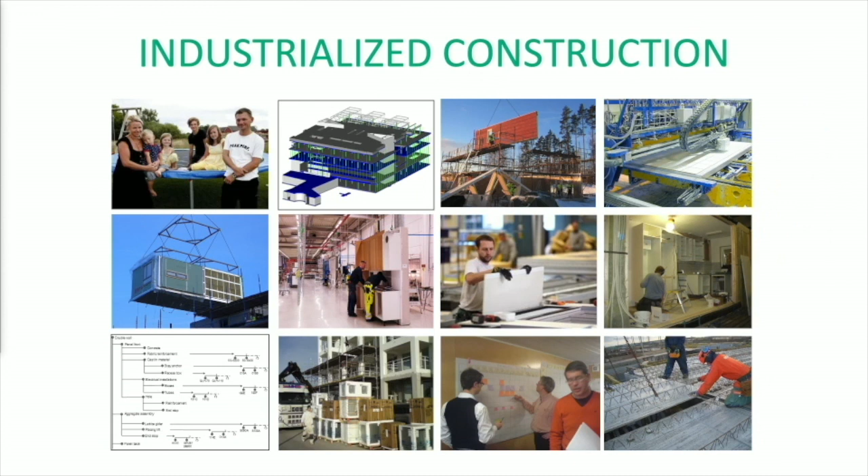Well, the fast answer is that it's all this. So what is all this? Well, these are a number of different aspects that I think are required to make up the concept of industrialized construction. As you can see, there are many different aspects - there are even some more that are hard to get on a picture. But I think obviously prefabrication, automation, and production methods are there - maybe some of the things you come to think of when you think of industrialization.

But you can also see that there is the use of digital tools and systems - it's there already from the beginning. But we also have standardized technology, standardized processes, we have planning, long-term relations, logistics, and not least, customer and market focus. So to really make sure that we are producing buildings, homes, offices, hospitals, or whatever we are building, that are in line with our customers' needs and what the market requires from us, with all the prerequisites put on this.

Then you could argue, okay, yes, but we have heard this before, we have heard it for many years. Standardization is nothing new, and planning has been carried out since the beginning, and so on. All that is, of course, true. But this is the thing: all these aspects need to be integrated.

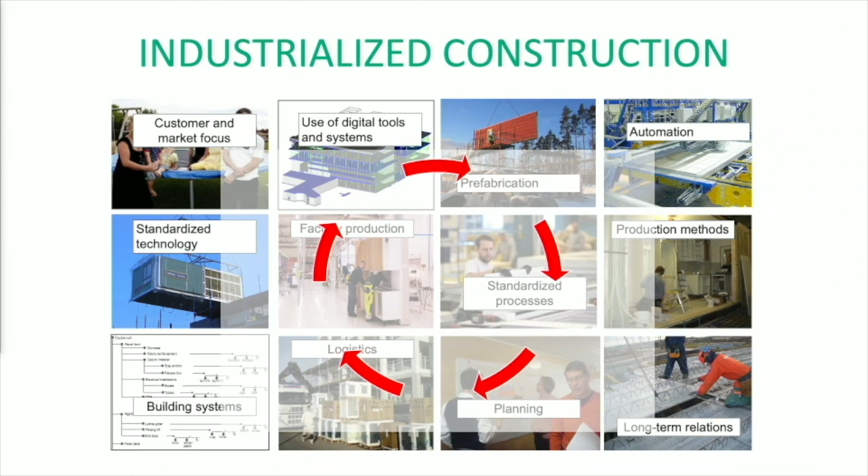So the first point here is that industrialization is not only prefabrication and manufacturing. All these parts that you can see in the blue wheel must be considered, and they need to be integrated. You see digitalization is there too, I just want to stress that.

But the thing is that the starting points of an industrialization journey can differ. You could have the start in digitalization - we see more companies doing that now than 20 years ago. But you could also have the start in really, really thorough planning. You could also have the start in prefabrication, or in technical systems, building systems, or product platforms, as we also call them.

So I think this could be a summary, saying that there are very different recipes for how to address these challenges, but I argue that the ingredients - these 8 or actually 9 themes or subtopics - are the same, and they need to be there to some extent.

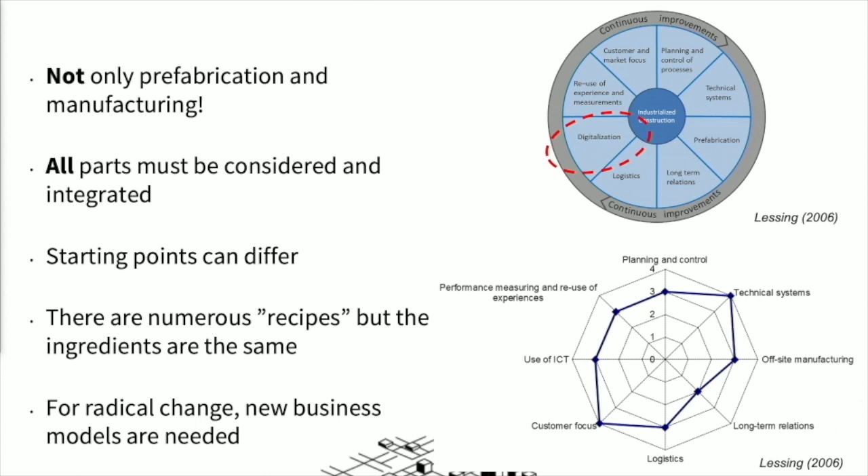But I think it's also important to think about this: if we want radical change, then new business models are needed compared to what we are used to seeing in construction. And one part of a new business model, or a sort of radical change in applying industrialization, is to use platforms.

You mentioned it, Mathew - I think this is super powerful. It's about structuring our technical solutions and our processes in platforms. We see it in many other industries, and there is a huge opportunity for us in construction to adopt that and create it to fit with our needs.

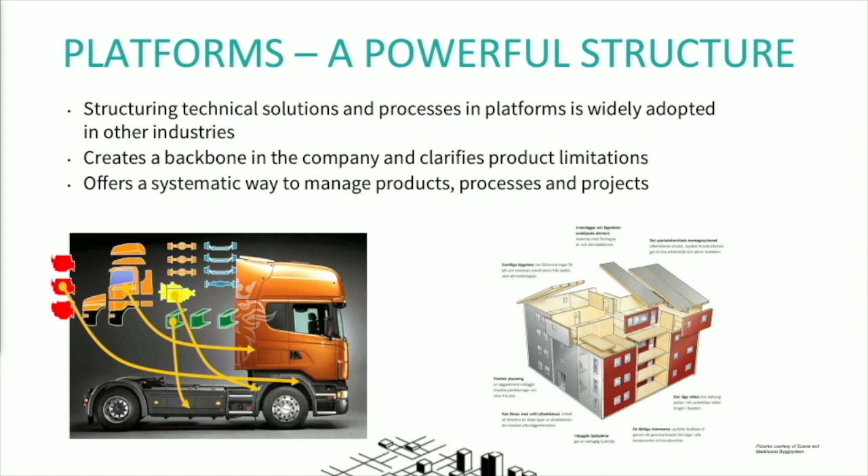Then it can be a backbone in the company. It can really clarify our product limitations, what we can do, and keep us laser focused on what we should do. It's a systematic way to manage our products, processes and projects. We have to have that balance to look beyond the singular project, work with platforms and the way we are working. But of course, that has to really reinforce the way we execute our projects, because that's what we do at the end of the day.

Okay, so platforms - is that one way to do it? No, same there - at least 4 main platform strategies exist, ranging from a fairly low level of pre-definition of the product, the building that we're building, to a very standardized level, where it's basically standardized products that we build, and we can almost select the variant. There's a super interesting range there, a very strategic choice to make - what level should we be at in order to achieve and fulfill our customers' needs and wishes?

And the thing here, if we want to work with platforms, well, then we really need powerful digital solutions if we want to succeed with this. So this could be one way where it really meets - industrialized processes meet digital solutions, and also digital processes, of course, and opportunities in that. We can come back to what this can mean during the discussion.

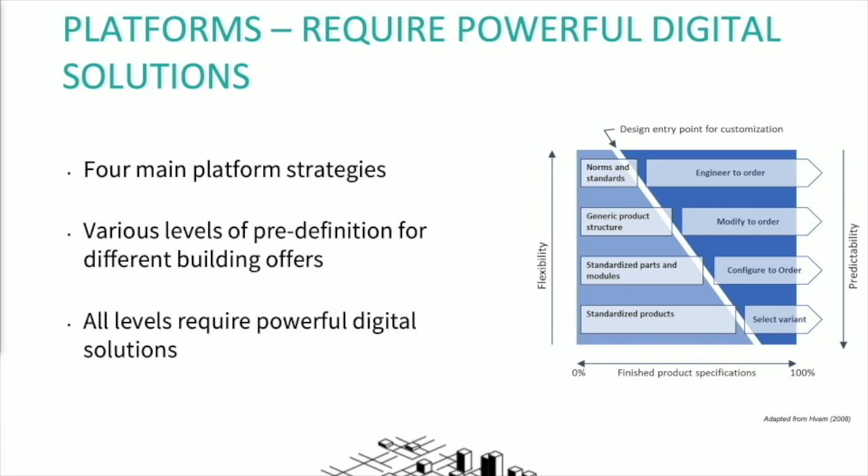So to sum up, I think it's pretty obvious our industry needs to improve radically in terms of sustainability, productivity, speed, safety, and a number of other things. I still think industrialization offers many ways to address that. I say many ways, different recipes, same ingredients, and to succeed, digitalization is crucial. So thanks for letting me give my view on this, and I'm eager to continue the discussion.

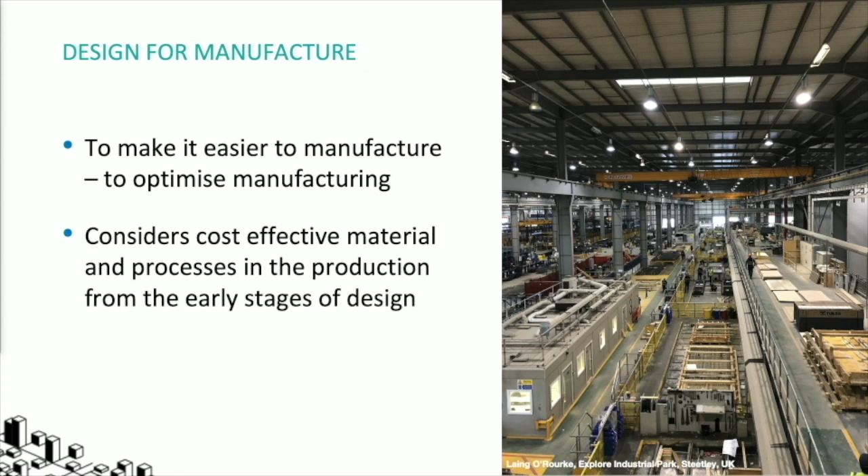I wanted to think about that process of how we deliver buildings, and design for manufacture is something we've talked a lot about in the circles I've been part of. This is Laing O'Rourke's factory in the UK—really that idea of designing for manufacturing processes to make it easier to manufacture, to optimize manufacturing, and consider cost-effective materials and processes in the production from the early stages of design. When we start to think about industrialized construction approaches, a lot of decisions need to be made earlier in the process and things are locked in—it's not quite the same sort of traditional approach to a project delivery. I'll say a little bit more of that at the end.

Design for assembly, so making it easier to assemble on site, to optimize part and system assembly. Considering cost-effective numbers of parts, handling, assembly, operations—and this might be considered both off-site and on-site.

The image here is of what was for a moment the highest volumetric housing in the world, in Croydon - a steel-framed volumetric housing development by HTA Architects. Given how fast things move, it probably isn't the highest anymore.

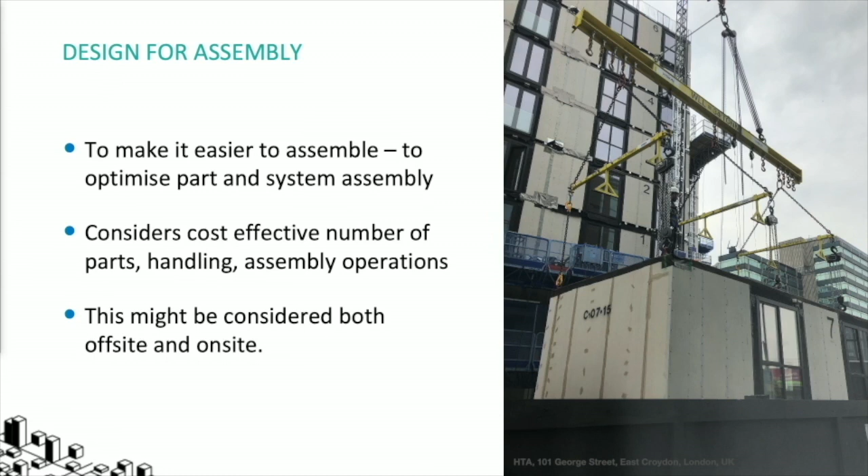When my colleagues from Singapore were over, they were talking about the volumetric production going on there. But I think it's important that it's not just designed for manufacturing, it's designed for assembly on the construction site. We've tended to think about it in terms of a systems engineering process.

What's important about a systems engineering process is that verification and validation is at its heart - having good information, ensuring that information is robust, ensuring that what's being built on site connects with the digital information you have, and that process of ensuring robust delivery is very important.

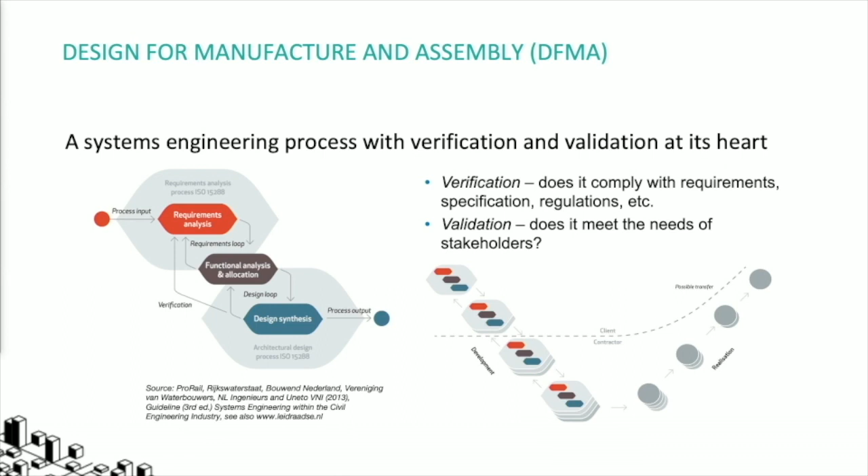This is my last slide, so I wanted to end by flagging some work we've been doing with Alexander Zhou, who's in the audience, on the kinds of digital project capabilities we've traditionally thought of, and the digital manufacturing capabilities that in construction we're starting to think about having.

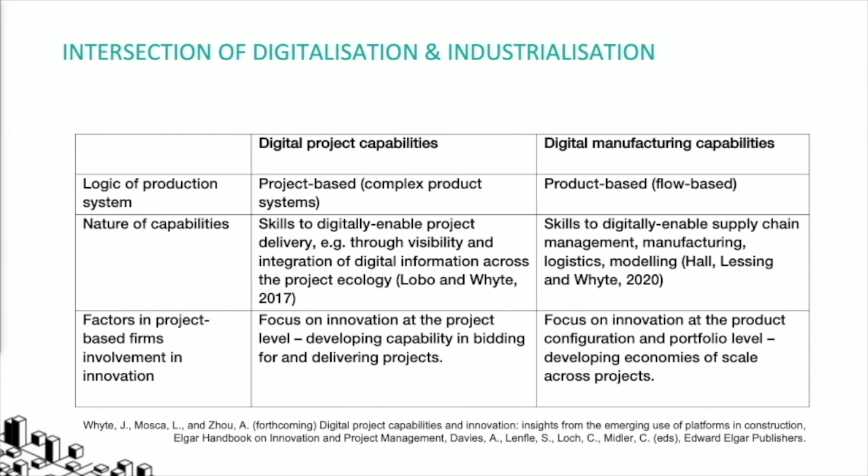What I took away from this exercise of mapping the project capabilities and the manufacturing capabilities is that when we think about industrialized, digitally enabled construction approaches, particularly digitally enabled product platforms, they're really changing the decoupling point where a manufacturing industry meets a project-based industry. That shift is sometimes difficult to get a handle on - to really understand the skill sets we need in construction.

We need to be able to deliver safety-critical buildings, sustainable buildings, buildings where we have information about the assets so we can run them sustainably. I think there are lots of reasons why digital information is vitally important to us as a society - not just as companies, but as a society - to run our built environment better and understand it better. That's where I'll end my pitch. There's lots we could talk about. Thank you.

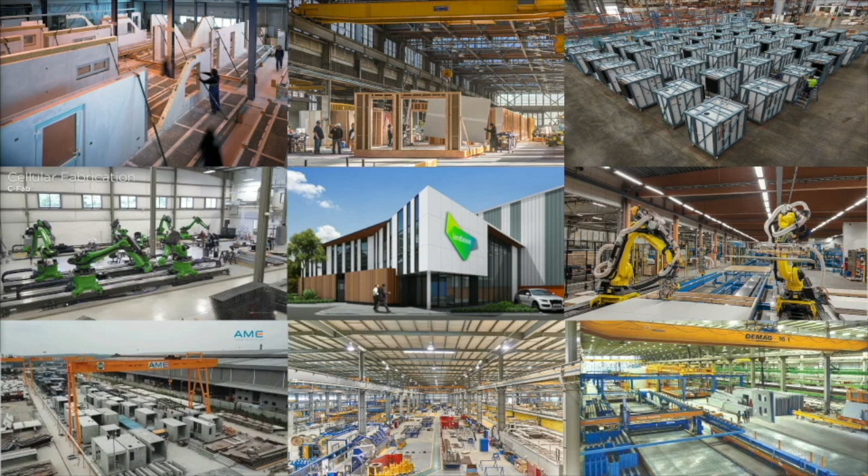This slide shows 9 different examples, somewhat randomly selected from around the world. These are all facilities constructed to support this idea of industrialization for the building industry.

One of them is Lendlease in the middle. The story of the slide is a third of these businesses are thriving and successful, a third are endangered species on life support, and a third are shuttered and gone, which includes the one from Lendlease.

What we can see with these businesses is they're really impressive. They had fantastic technology, different range of products, very smart people. They thought their processes through, did their market research, had excellent business plans, and ranged in scale from $10 million of investment to over $200 million in one example. So this bears a little scrutiny as to what's going wrong if we're getting these fantastic investments with these brilliant plants and it's not paying out.

I think it's helpful to categorise what's starting to emerge as a series of different delivery paths for our industry, to see where these things fit. We know conventional construction, we've had off-site construction for at least 200 years. It has a great place, it serves certain needs. But we've now got these new pathways emerging of manufacturing.

The difference between off-site construction and manufacturing is really an economic one. What we see with manufacturing, in my definition at least, is that there is a repeatable product and a repeatable process, and I think Yoko was referring to that as well. Why that's important is that repeatability gives rise to a learning effect. It's that simple. We learn how to make something better, it becomes a better product and a cheaper product. And that's the economic impact which those first two processes don't yield because they're very much about bespoke delivery.

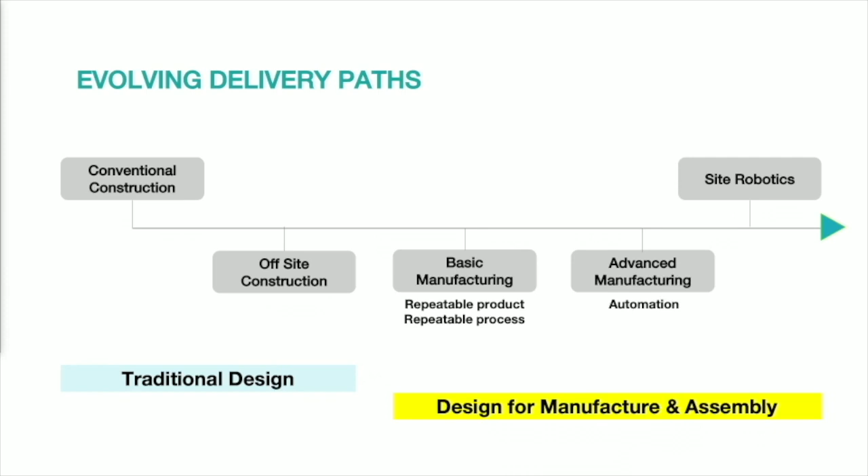Something that's pretty recent is the emergence of site robotics. This is finally becoming real. We're seeing the first couple of examples just land on projects now. And really the key point of this slide is exactly what Jennifer was talking to, that if you want to get to these other delivery paths, there's this crucial thing called design for manufacture and assembly, and it's very different from our traditional design approach. It's being taught in some places, but not in enough.

So what's missing? What are we not doing that is allowing this industry to move forward to these new delivery paths? Well, I think the first thing is we're not seeing a consistent product. We're still overvaluing the bespoke versus this idea of standard SKUs. Something almost all these business plans are getting wrong is this idea of a consistent pipeline. And it's a scary issue because it's whatever you've written in your business plan multiplied by about 10 to get to the level of consistency to drive those factories that we saw in the first slide.

One of the killer issues is we're not delivering on the D in DFMA. We're giving it lip service. We're talking about it in these forums. There's a few educated designers out there, but we are not intentionally designing our buildings so they can be manufactured. And that's a problem because without these things, we just don't get to that economic benefit.

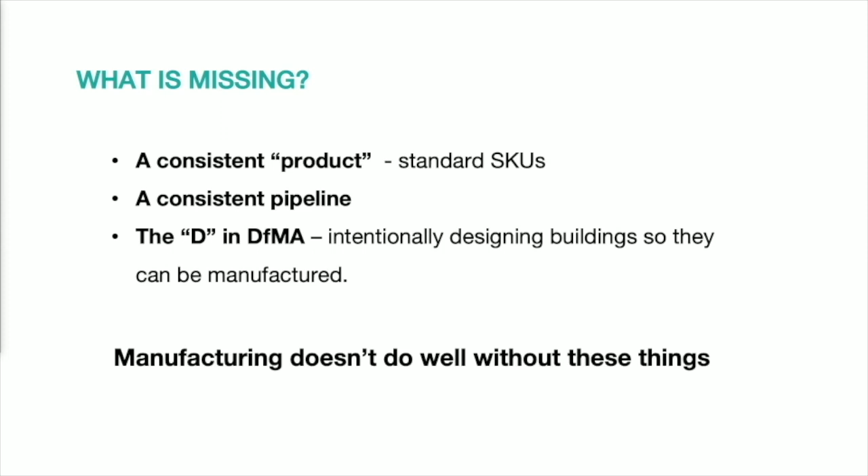So if DFMA is so good and it's doing so much for so many other industries, why are we struggling with it? I think these six points come to mind pretty quickly. There's some DFMA knowledge in the industry, but it's not where it needs to be. It's scattered randomly amongst the suppliers. It's not explicit - they're not hiding it from you, it's just no one's really asked them to make it explicit. So it's not available to the designers who ultimately need it.

Research that came from Building 4.0 and preceding research pointed to the fact that we haven't really written the DFMA rules yet for large objects. They're very well known if you want to manufacture a toaster or a washing machine, but does that translate when we're doing something of thousands of tons, large-scale components?

And then the issue of sequence, and I'm talking about design sequence. You know, I am a recovering architect. I know where we start the design process - we do it in the macro issues. We think about schematic design long before we get to detailed design. And I'm not really interested in contemplating things like floor panelization and connector systems when I'm thinking about concept design and massing. But these are fundamental things if we're going to get into this DFMA space.

Responsibility. I think there's a few design professionals that say, I'm not sure why this is a problem that I need to get involved with. This sounds like the builder's problem. Surely they're going to be the ones who are going to solve the delivery process. And I think we've got to look at it differently and say, it's not the builder's problem, it's not the architect's problem, it's all of our problems that we're going to have to come together and think about.

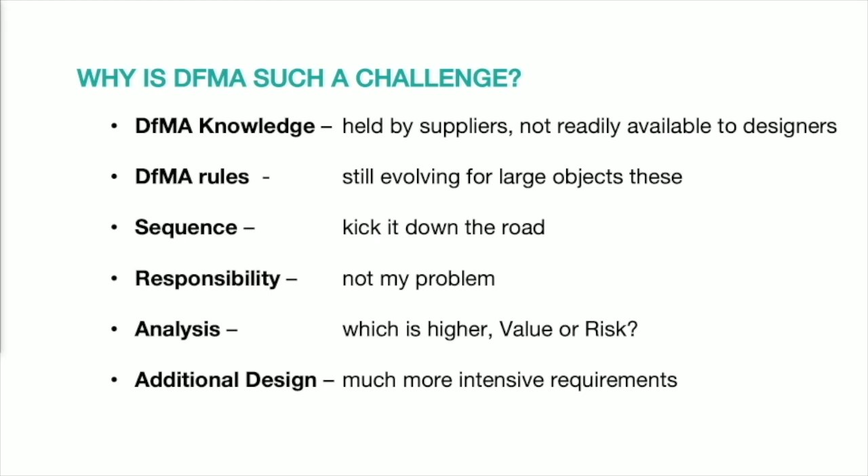And what I'm talking about is in this example here. I mean, this is pretty much the simplest construction method I can think of. Light timber framing, it's used in a lot of places. A skilled carpenter doesn't need much information. The basic plan on the side of the image there and hopefully an elevation or two, and most of the time they can do a pretty good job, right? It's a low level of information.

Now you can buy machinery and set up factories that can make these wall systems. They're all around the world. That machinery requires a lot more detail. It needs to know the cut length of every single piece of timber. It needs to know the position of every single piece of timber, and it needs to know where every nail is going to go to hold it all together.

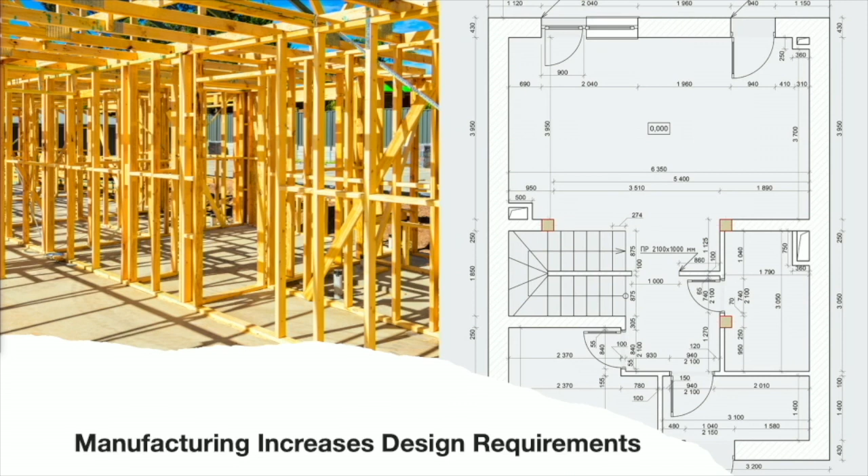I don't think that's something the design professions are particularly interested in spending their time creating, which is a good segue into the digital opportunity. And so we can use software today to start to generate high design detail. That's something that Lendlease Digital has been particularly focused on for the last couple of years. We can also build those analytical tools and we can put them alongside that design generation.

And if we go back to where is that DFMA knowledge that the suppliers are holding, well, we don't want that published on websites or put into catalogues or maybe relayed in a summit. We want that to be encoded into the software so that it's always available as part of the design process, that we make the right decisions as we do the design work.

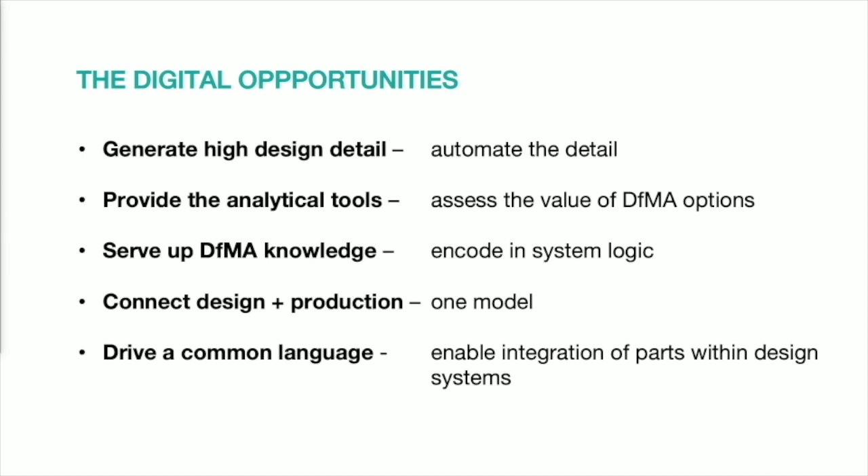If we think about common languages, the technology industry was also poor at this historically. It's become very good at it. If you think about things like Bluetooth as a standard, it's the same standard whether you're in Nigeria or Norway or New Zealand. And how did that come to be? It certainly wasn't because the governments of those countries got together and had a forum. They'd still be picking the venue. It was really pushed out by the tech industry. It's kind of a forcing mechanism that if you want to play, you've got to conform with a standard. And I think that's one of the things we're going to see emerge with the shift to a platform-based technology approach.

So, a digital construction platform. Here's one abstract view of what that could look like. The single job of a platform is to connect party A to party B. In this case, it's the suppliers to the industry and the designers who want to consume the products they have. We could think about that in two different ways.

We could think about proprietary products that a supplier makes that no one else has, which could be offered up as a standard component and listed in a catalogue on a construction platform. Or we could go the other way and specify generic products, maybe the idea of a curtain wall, a wall system, or a bathroom pod, with attributes defined clearly enough that multiple suppliers could offer up their alternate for that product.

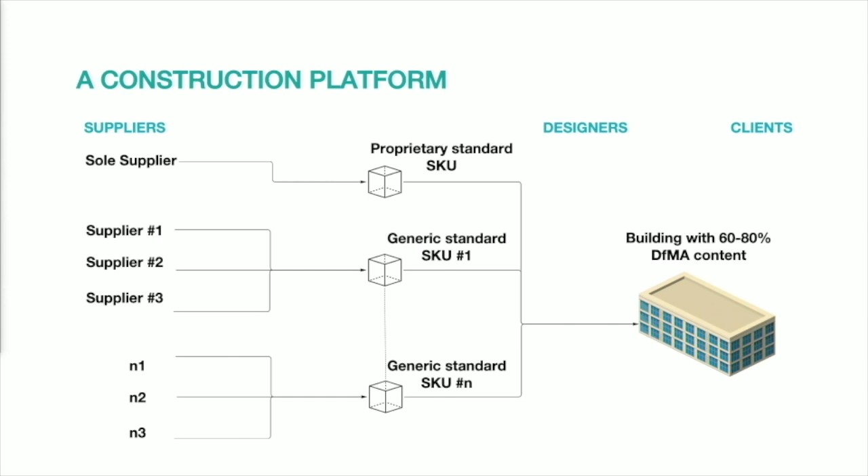And if we've got that sitting there, all that content with those SKUs, we need to add a few things to it. We need to write those interface rules, how Part A will fit Part B, how System 1 will talk to System 2 — so a system of space informing a system of structure.

And then we can make those systems generative. We've seen that happening all around the world in design practices already, where we can take algorithms and get them to do multiple design tasks. But then the fun stuff happens, because once you've got the output of that, you can take all of it.

And look at it in a combinatorial fashion, and make an assessment. Is it good? Is it sustainable? Is it safe? Is it economical? And then the best thing is it's recursive.

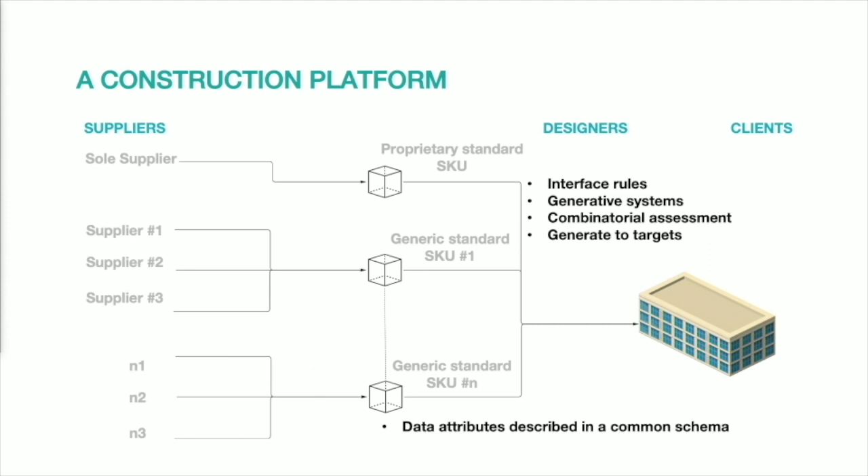You can take that information, feed it back through the generative system, and let those systems start to optimize based on that assessment. Think of it like goal-seek in Excel — you can start to take all the parameters of a project and hunt for better and better outcomes.

So if I've lost you, or it sounds like a little bit of fantasy versus fact, I'll give you a couple of minutes here of some snippets of what we've been building. This is very much a digital platform that does automate parts of the design.

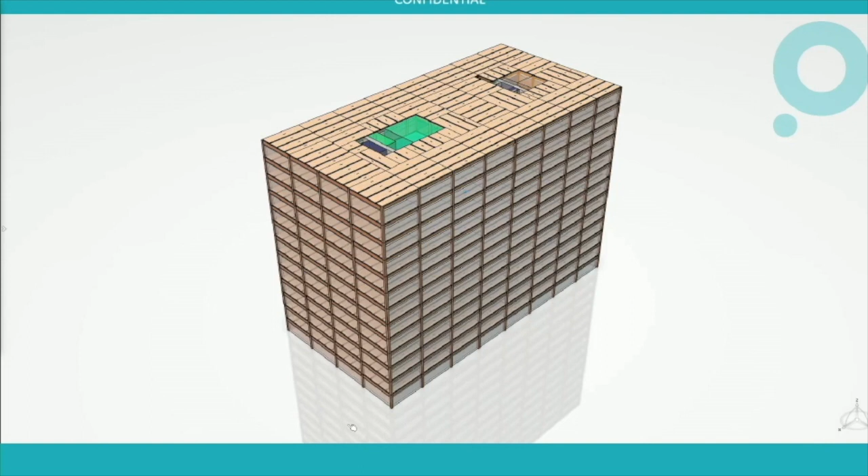I'd like to offer up perhaps there's a fifth level to Jyrke's diagram, which is a generate-to-order model. So what we're looking at here is a building that's not drawn, it's not assembled from a BIM library — it's fully generative. And it solves not just the geometry, but the actual physics.

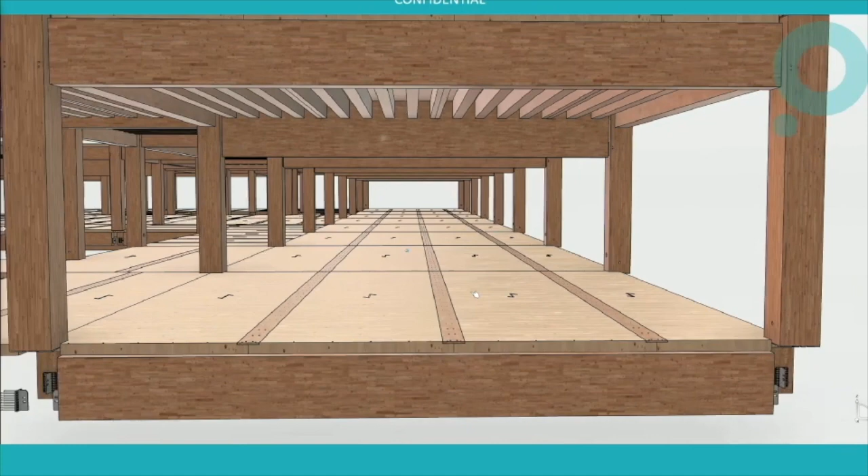So it's starting with the task at hand to say, what are the loads the building must carry? What are the forces that will be present at each connection? And what it does then is it goes off and looks at those catalogues, at those standard SKUs, and says which components will satisfy the tasks that the system is calling for.

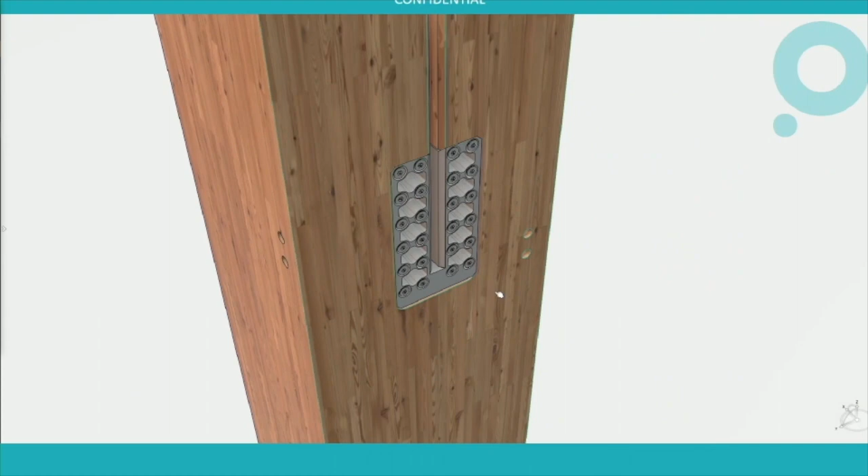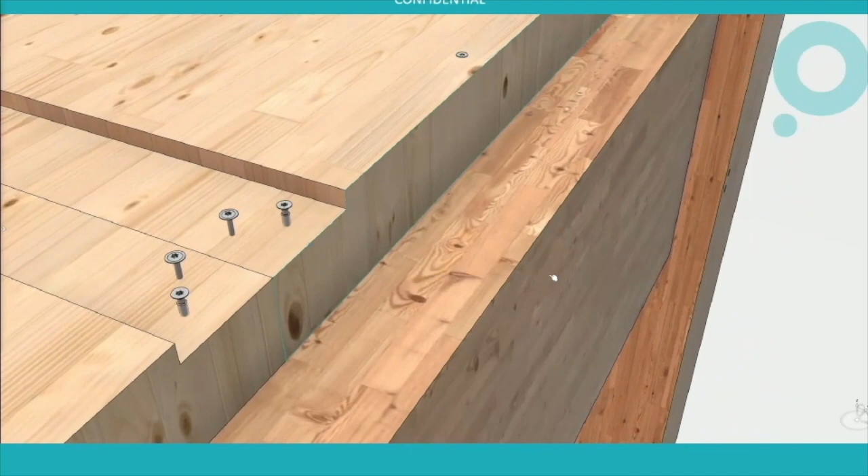And you can see here it's called up connectors and hardware to install them with, and it's placed them correctly into the timber, and it's detailed the timber. It's that level of detail that none of us are interested in actually drawing, but the machines that are going to produce this are going to need.

And if you speak BIM, it's an LOD 400 model.

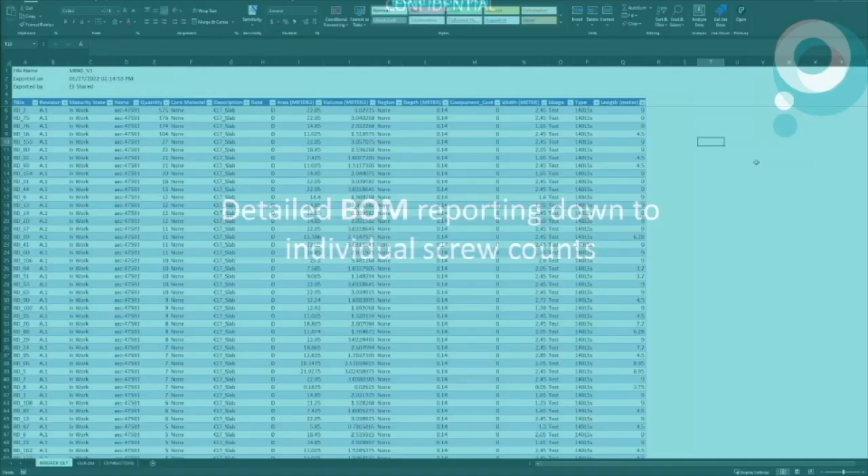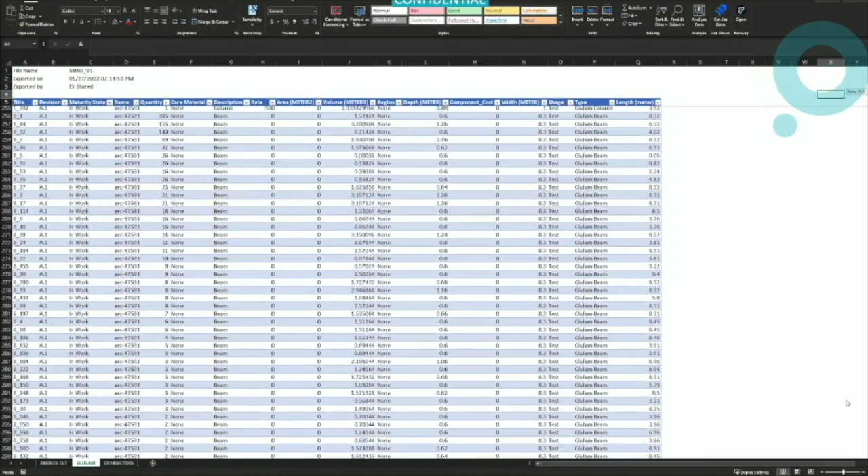So with all of that information being generated automatically, we've got a rich series of possibilities of what we can do with it. We can obviously produce bills of materials like this. We can have them priced at a very detailed level. We can use this information to order and plan the project with. We can cut and dice it and give it to the sub-trades in a way they never had clarity on before.

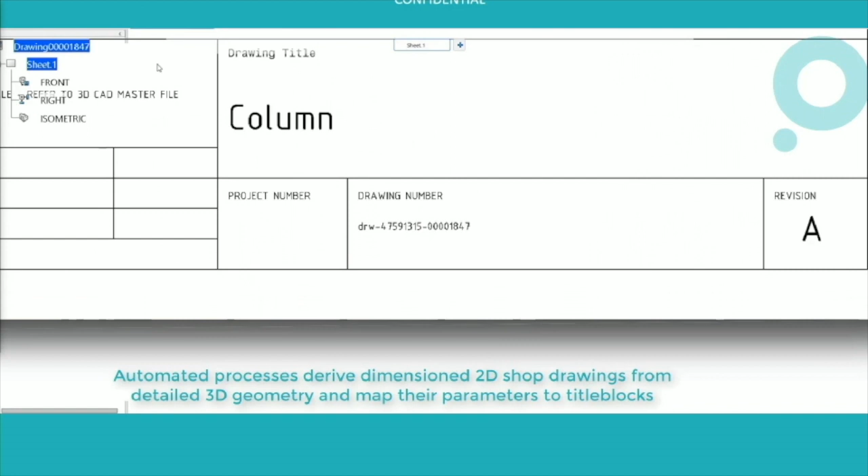We can do some other things. We still need shop drawings. The machines don't need them, but the supervisors who look after the machines do. No one wants to draw shop drawings — it's very tedious. No one came out of university saying, let me draw shop drawings. So let's automate that process. Click on anything in the object model, and it will produce a standard 2D drawing. It'll annotate it, add the dimensions, and it's ready to go.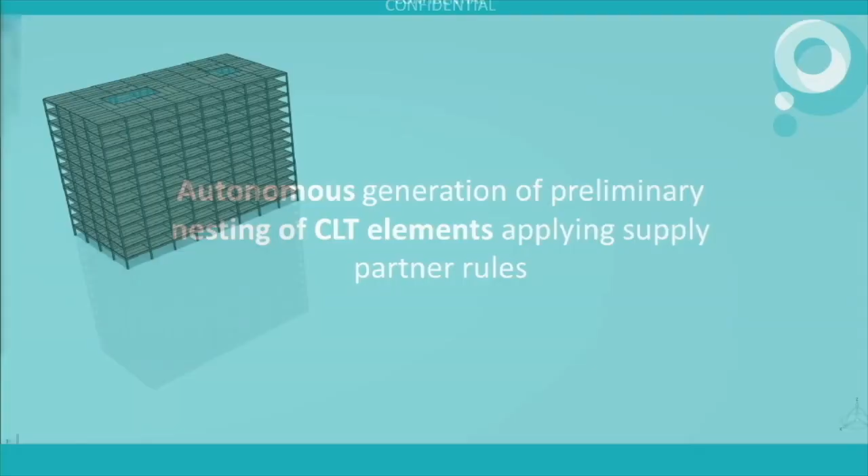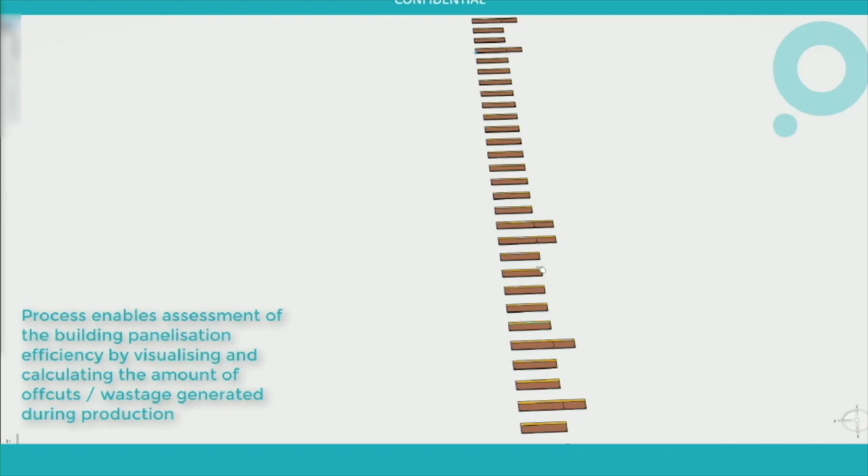Now we can start into some real DFMA concepts. We can say, well, let's examine this building for its efficiency. This is intended to be a mass timber building. The CLT panels are cut from master panels. The level of waste left behind in the factory has to be paid for, so if we want to make this building economic, we need to minimise the waste. The yellow on those panels is the waste piece that's not being used.

As I said, it's a recursive process. You can run this design loop as many times as you like to minimise that waste function.

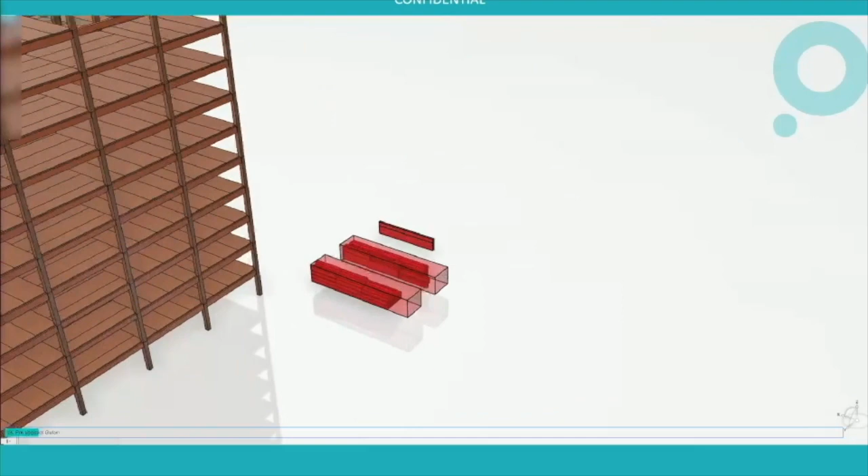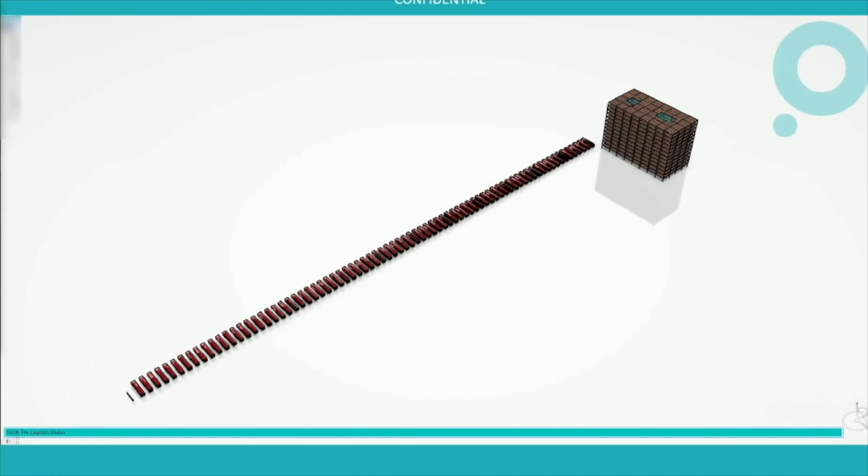Second stage in this DFMA process is to look at logistics. We've got to truck this thing from a factory to a site. It's an extremely tedious process to have humans do, but digitally straightforward. Let the software plan the loads, let it figure out the weight and balance of every truck movement, let it figure out the construction sequence.

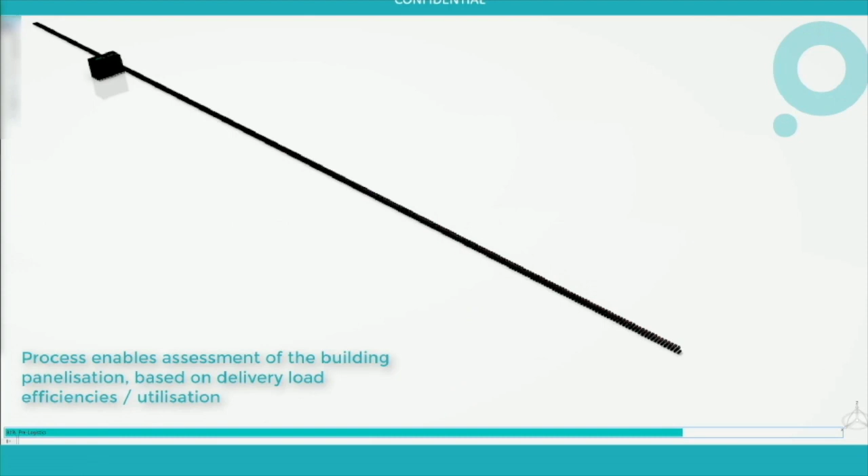Now that we have this information, we can understand the cost and the carbon footprint associated with these traffic movements. And it always comes as some sort of a shock to people that that little 7-storey timber building needs 91 truckloads of movements to get to the site with the timber frame.

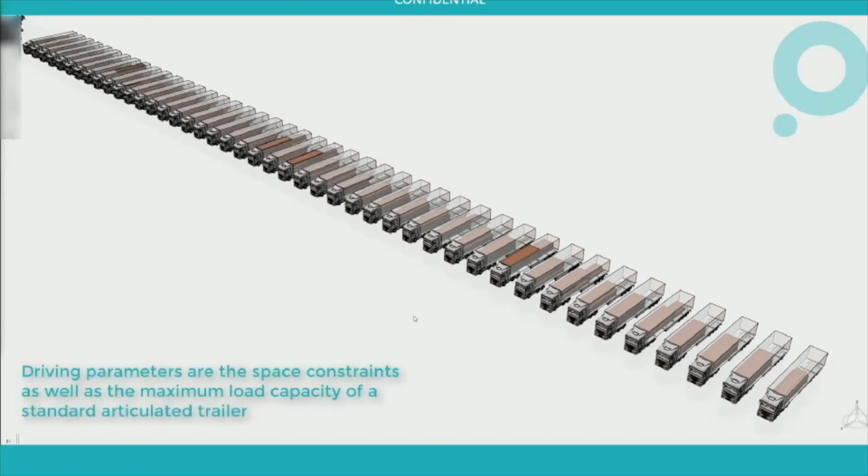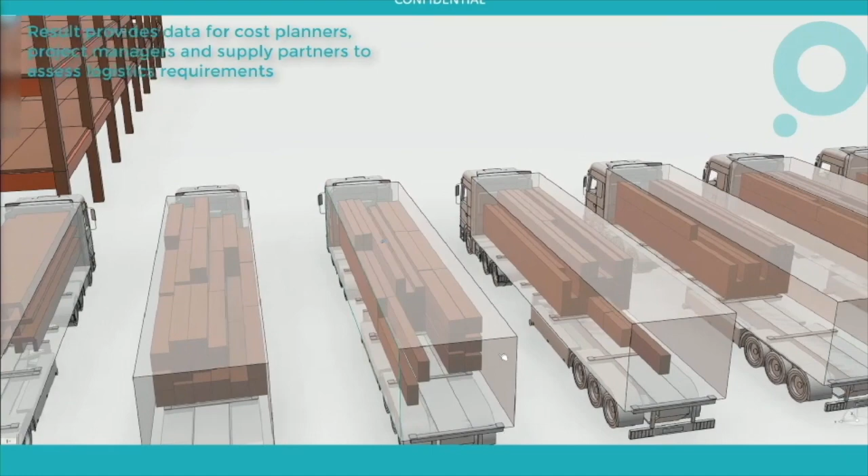And then the third, that information can be shared with different parties in different ways. We can give it to the manufacturers, to the trucking companies, to the construction teams who can inspect the trucks as they arrive to make sure it conforms with their expectation. Those sorts of information reports look like this.

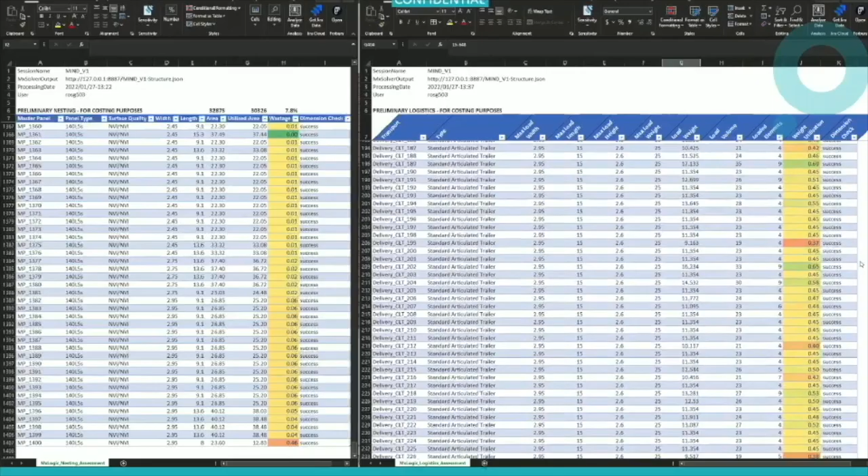As I said, very tedious work to have humans do. And the real point here is this is happening 2 to 3 minutes after the first concept moves are made in the design. It's not something that happens a year and a half later when this has been handed down the chain to the suppliers.

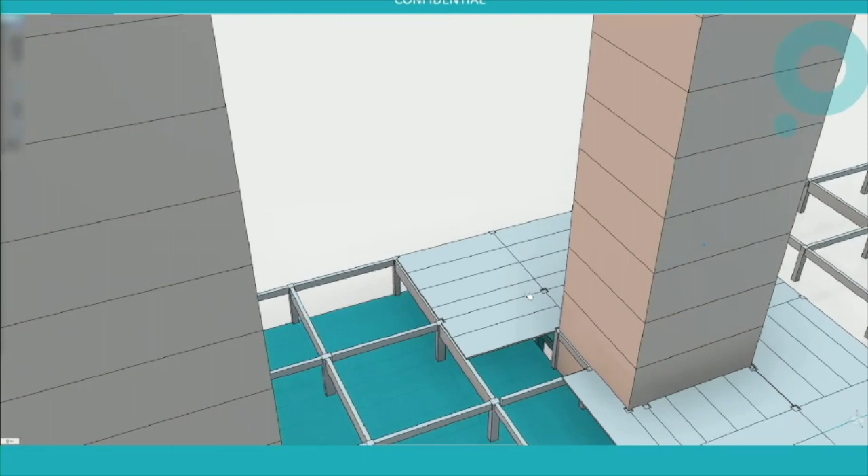Third and final stage of what we're showing here is schedule automation. So instead of asking a construction person to plan out the job, the software is planning the build sequence. It's showing us a model for each week of the build, a nice clear visualization of what's going to happen.

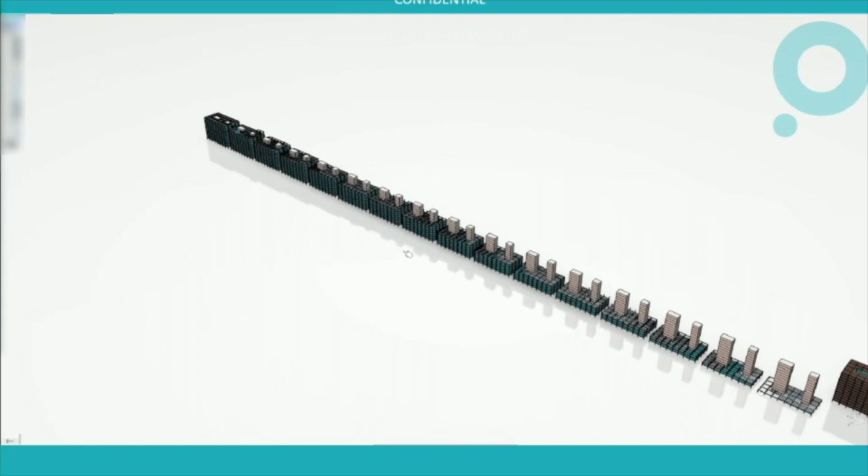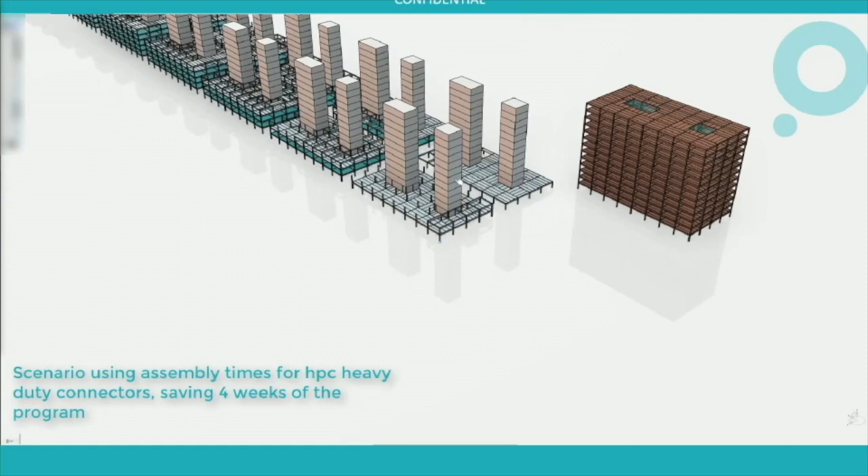And again, we can run multiple scenarios. We've laid out a base scenario, and we can ask a question: what if we use a more expensive connector type between some of the components? It's more expensive, but the manufacturer says it will require less labour and take less time to put the building together. And that's the answer we get here.

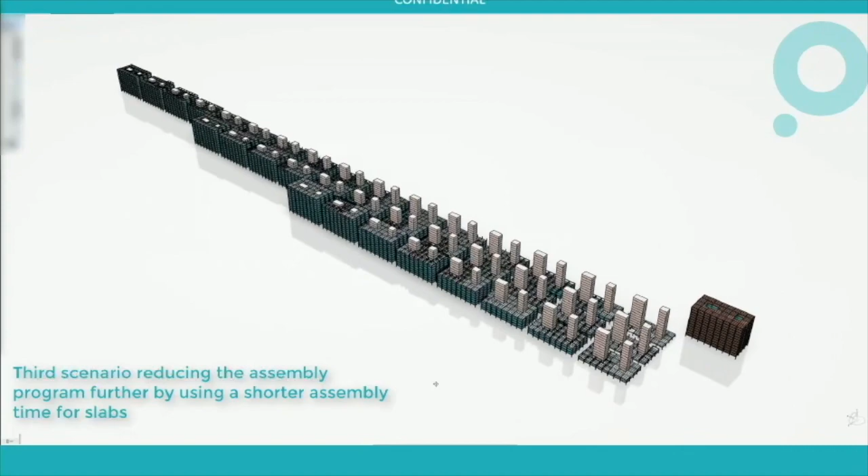And we can keep running these scenarios. We can add resources, add cranes, change the number of crews working, and model the economics of this, and we can tell the client: you want to build this building cost effectively, here's the best scenario. At this point, we haven't involved a builder, we haven't gone out to tender, and we're still playing at the concept level to understand the possible options.

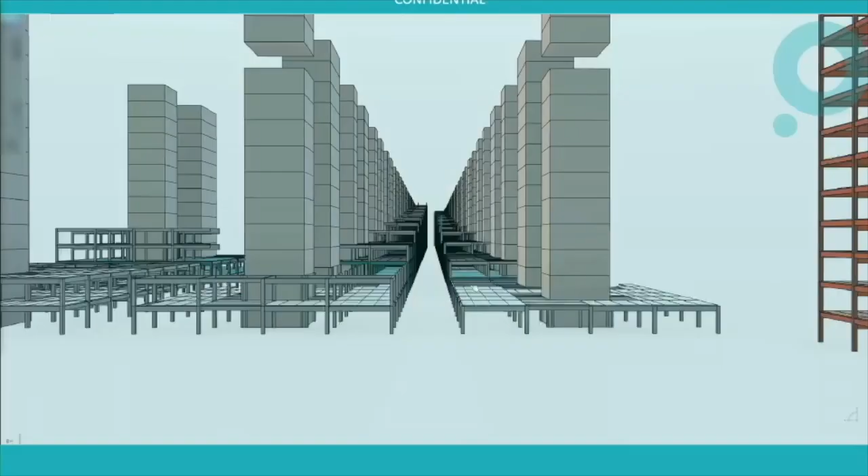So in conclusion, I very much have to agree with what we've heard from the previous two speakers, that this is not an 'or' question. It's not a question of industrialise or digitise and jump to one or the other. It really is an 'and' issue, that you need both, in my view, if we're going to move forward.